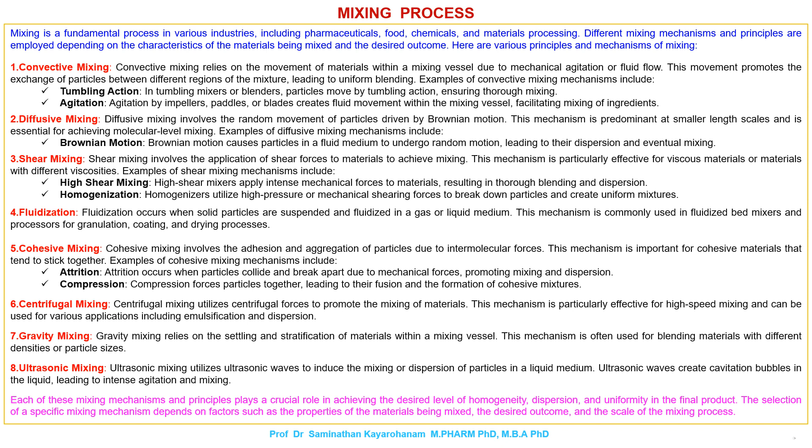The selection of a specific mixing mechanism depends on factors such as the properties of the materials being mixed, the desired outcome, and the scale of the mixing process. In the world of mixing, the types can be categorized based on the materials being mixed. Here's a breakdown of the common classifications.

Solid-solid mixing. This is the most widely used type of mixing, especially in pharmaceuticals and food production. It involves blending dry ingredients like powders, for example, active pharmaceutical ingredients (APIs), excipients like fillers and binders in tablets; granules, small, uniform aggregates of powder particles; tablets, which may need gentle mixing to avoid breakage.

Liquid-liquid mixing. This type focuses on blending miscible liquids to create uniform solutions. Applications include dissolving APIs in solvents for further processing, mixing flavorings or syrups in beverages, and preparing homogenized emulsions, mixtures of two immiscible liquids, like oil and water.

Solid-liquid mixing. This method incorporates solid particles into a liquid phase to create suspensions or dispersions: preparing suspensions of antibiotics or anti-inflammatory drugs, incorporating flavoring powders into syrups, mixing pigments into paints.

Gas-liquid mixing. This type involves dispersing a gas into a liquid to achieve various purposes. Examples include carbonating beverages by saturating water with CO2 gas, oxygenating water in aquariums or aquaculture systems, and fermentation processes where yeast interact with sugars in a liquid medium.

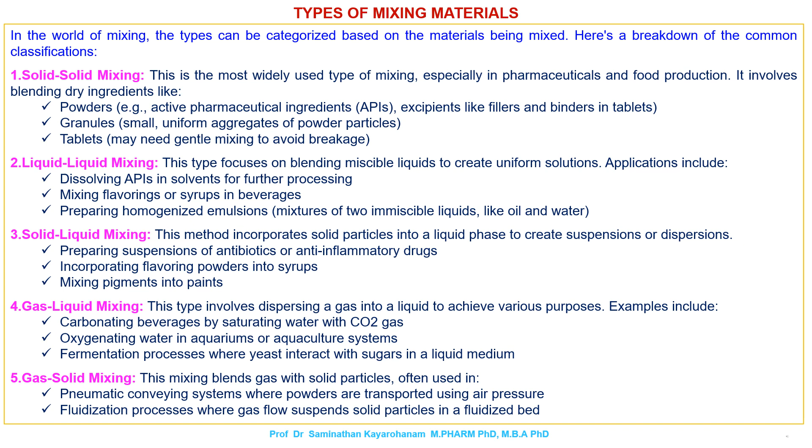Gas-solid mixing. This mixing blends gas with solid particles, often used in pneumatic conveying systems where powders are transported using air pressure, and fluidization processes where gas flow suspends solid particles in a fluidized bed.

The pharmaceutical mixing process is a fundamental step throughout various stages of drug development and manufacturing. It ensures the uniform distribution of ingredients, which is critical for achieving consistent drug delivery and therapeutic effect. Here's a breakdown of its applications and uses. For formulating drug products: solid dosage forms, tablets, capsules.

Mixing is essential for blending active pharmaceutical ingredients, APIs, the medication itself. Excipients, inactive ingredients that serve various purposes like fillers, the dosage form. Binders hold the ingredients together. Disintegrants allow the tablet to break apart after ingestion. Lubricants improve flowability during manufacturing.

Liquid dosage forms, syrups, suspensions. Mixing is used to dissolve APIs in solvents, syrups, or other liquids, and to create uniform suspensions by dispersing insoluble drugs or excipients. Pre-processing steps. Granulation, converting fine powders into uniform granules for improved flowability during capsule filling, and consistent tablet disintegration and drug release. High shear mixers are often used for this purpose.

Wetting and dispersion. Mixing helps incorporate poorly soluble drugs into liquids, and insoluble excipients to create uniform suspensions. Other applications. Ointments and creams: mixing ensures the API is evenly distributed throughout the topical formulation. Sterile products, injectables: aseptic mixing techniques are used within a controlled environment to prevent contamination in the final product. Research and development: experiment with different formulations, various ingredients, compatibility and stability before large-scale production.

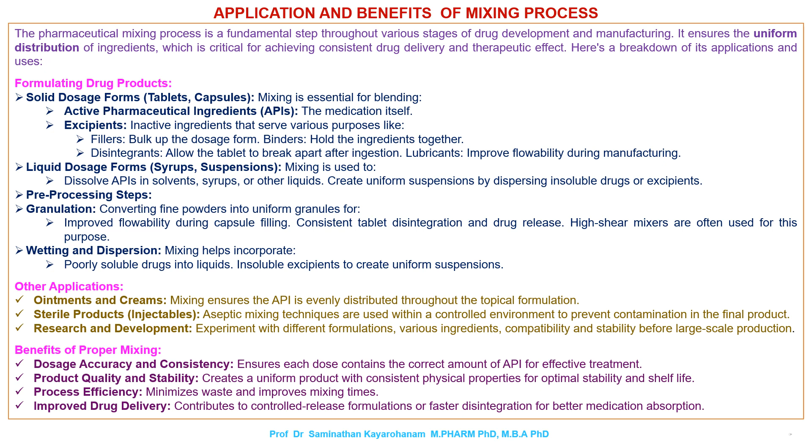Benefits of proper mixing. Dosage accuracy and consistency ensures each dose contains the correct amount of API for effective treatment. Product quality and stability creates a uniform product with consistent physical properties for optimal stability and shelf life. Process efficiency minimizes waste and improves mixing times. Improved drug delivery contributes to controlled release formulations or faster disintegration for better medication absorption.

High shear mixers are workhorses in the pharmaceutical and food industries, used for creating emulsions, dispersions, and granulations. Working principle. Feeding: the liquid and solid components are introduced into the mixing chamber. High-speed impeller: a high-speed rotating impeller blade generates intense shear forces within the mixture. This impeller can have various designs depending on the specific application.

Shearing action. The high speed and design of the impeller create several effects. Hydrodynamic shear: the liquid itself exerts a shearing force on the particles as they move around the impeller. Impeller particle interactions: the impeller blades directly impact and break down solid particles or droplets. Cavitation: the rapid movement creates areas of low pressure, causing bubbles to form and collapse. This collapse generates intense localized shock waves that further disrupt and disperse particles. Homogenization: the combined effects of shear, impaction, and cavitation lead to the breaking down of lumps, dispersing solids into liquids, and creating fine and uniform emulsions.

Advantages. Efficient mixing: high shear mixers achieve excellent mixing results in a short time. Fine dispersions: they can create very fine and uniform dispersions of solid particles and liquids. Emulsion formation: these mixers are highly effective in creating stable emulsions. Granulation: in wet mixing processes, high shear mixers can be used for granulation. Versatility: different impeller design customization to accommodate various mixing needs.

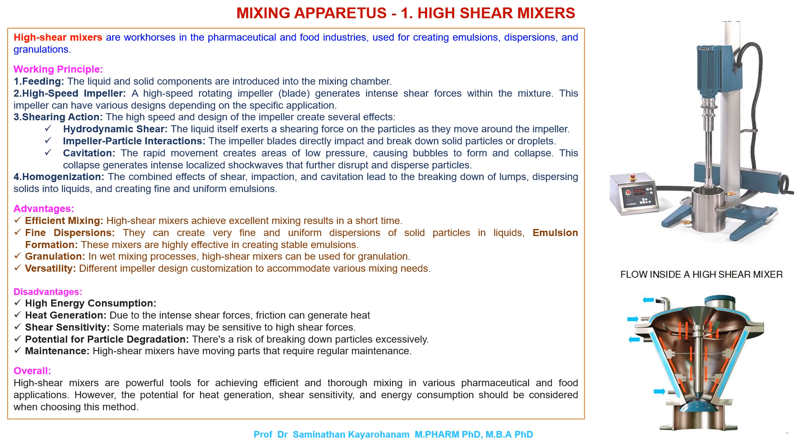Disadvantages. High energy consumption. Heat generation: due to the intense shear forces, friction can generate heat. Shear sensitivity: some materials may be sensitive to high shear forces. Potential for particle degradation: there's a risk of breaking down particles excessively. Maintenance: high shear mixers have moving parts that require regular maintenance. Overall, high shear mixers are powerful tools for achieving efficient and thorough mixing in various pharmaceutical and food applications. However, the potential for heat generation, shear sensitivity, and energy consumption should be considered when choosing this method.

Planetary mixers are versatile tools widely used in the food, pharmaceutical, and chemical industries for efficiently mixing a wide range of materials. Here's a breakdown of their working principle, advantages, and disadvantages. Working principle. Mixing vessel: the planetary mixer consists of a stationary bowl that holds the materials to be mixed. Planetary motion: a central shaft rotates the mixing arm, which carries an agitator blade. The key feature is the planetary motion, where the agitator blade not only rotates around its own axis but also revolves around the axis of the central shaft. This creates a complex mixing pattern that reaches all parts of the bowl.

Scraper attachment. Many planetary mixers incorporate a scraper blade on the arm that continuously scrapes the sides and bottom of the bowl. This prevents material buildup and ensures all ingredients are incorporated into the mix. Speed control: the speed of the rotation and revolution can be adjusted to suit the specific mixing needs and material properties.

Advantages. Highly efficient mixing. Minimal dead zones: the complex mixing pattern minimizes dead zones, leading to a more uniform final product. Versatility: a wide range of viscosities, powders, and thick pastes, making them suitable for various applications. Easy cleaning. Variable speed control. Disadvantages. Higher cost: planetary mixers can be more expensive compared to simpler mixing equipment due to their complex design and functionality. Larger footprint.

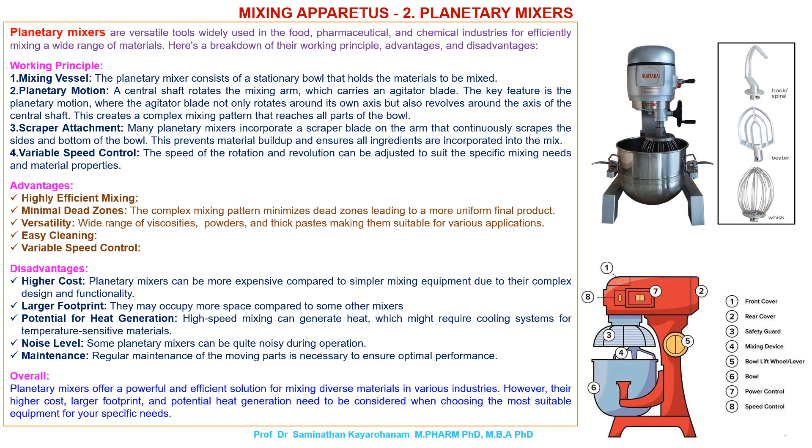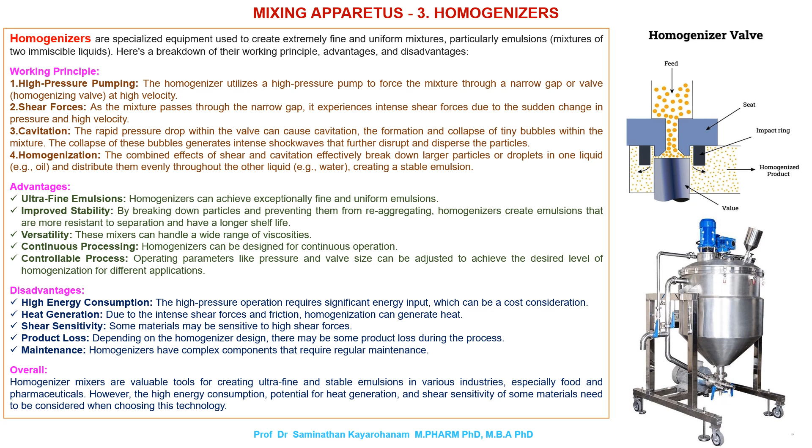Overall, homogenizer mixers are valuable tools for creating ultrafine and stable emulsions in various industries, especially food and pharmaceuticals. However, the high energy consumption, potential for heat generation, and shear sensitivity of some materials need to be considered when choosing this technology.

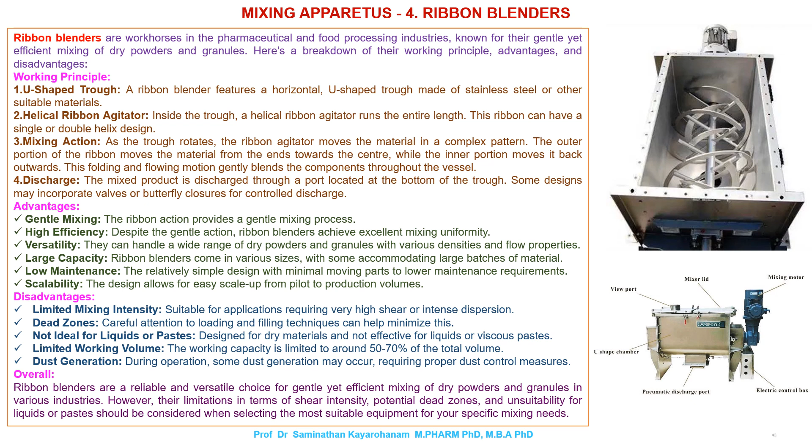However, their limitations in terms of shear intensity, potential dead zones, and unsuitability for liquids or pastes should be considered when selecting the most suitable equipment for your specific mixing needs.

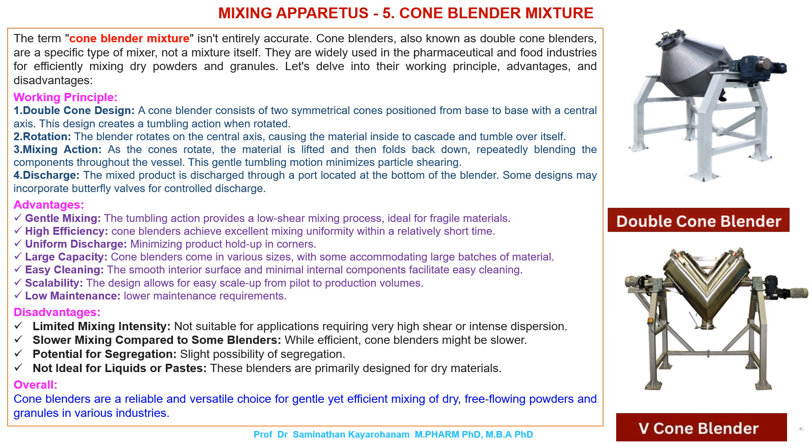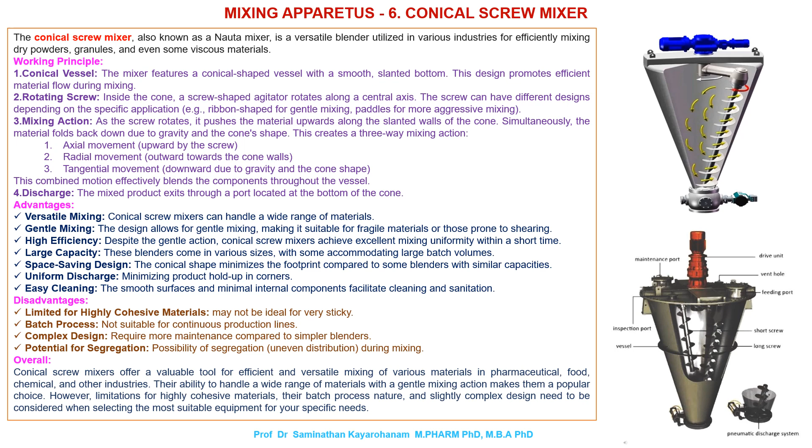Uneven distribution during mixing. Overall, conical screw mixers offer a valuable tool for efficient and versatile mixing of various materials in pharmaceutical, food, chemical, and other industries. Their ability to handle a wide range of materials with a gentle mixing action makes them a popular choice. However, limitations for highly cohesive materials, their batch process nature, and slightly complex design need to be considered when selecting the most suitable equipment for your specific need.